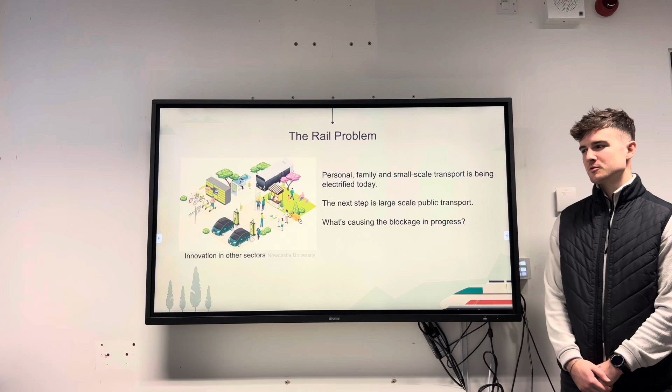Innovation is seen throughout many sectors. If you Google future cities and sustainability, images like this appear. What you'll notice straight away is your personal, your family and your small scale transport. You can see that with the cars, the electric bikes and the shuttle buses. What you are missing is large scale public transport.

So the next step is that. But what is the issue? What's causing the blockages? Why isn't this already included?

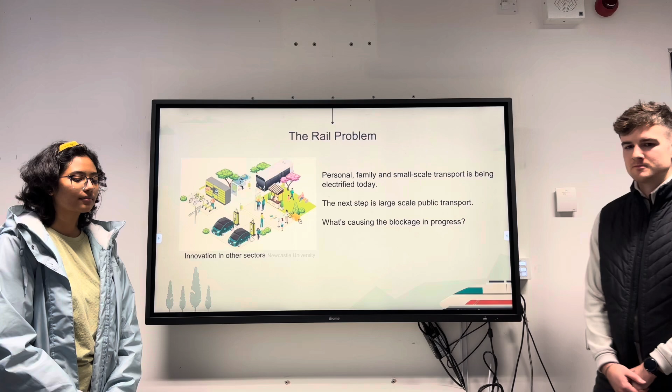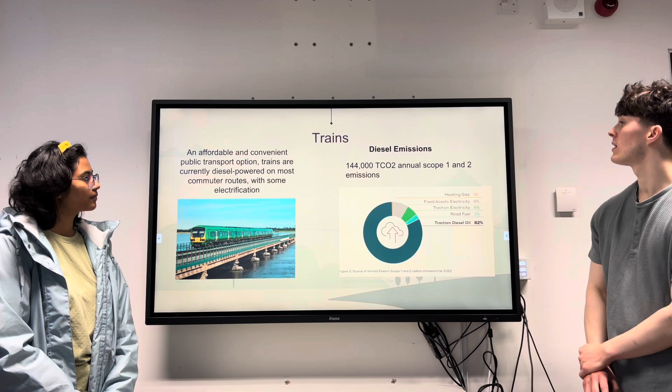Trains, as you know, are affordable public transport. They're convenient, and currently almost all run on diesel. There's a small bit of electrification in Dublin in the DART. This massive usage of diesel incurs high carbon taxes and massive greenhouse gas emissions, with 144,000 tonnes of carbon being emitted by Irish Rail.

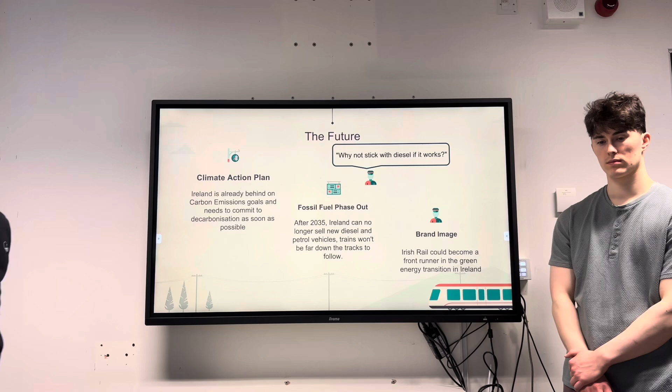Ireland is set to miss its climate action goals for 2030 and 2050. For 2030, emissions were to reduce by 51%, which is deemed almost impossible at the moment. Therefore, the country is facing high European carbon charges.

Fossil fuels are being phased out worldwide. The true cost of burning fossil fuels is being experienced through the environment and also through public respiratory health. Diesel engines will soon be obsolete, and we think that Irish Rail can take this opportunity to get ahead of the curve.

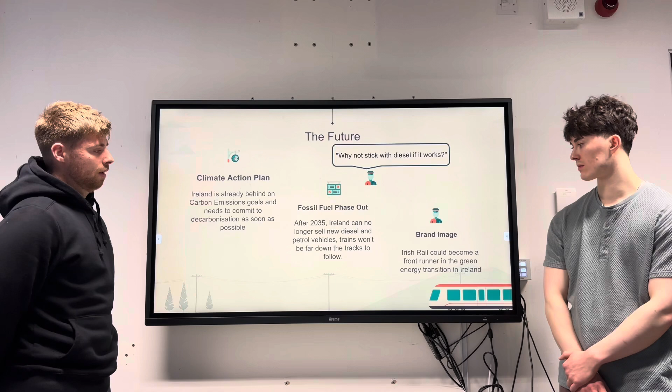Finally, we believe that this can offer Irish Rail a fantastic opportunity to become green ambassadors for sustainable transport across the world. Okay, so how do we solve it?

Modular batteries. Decarbonisation is costly, and batteries are a faster and more cost-effective solution than overhead electrification. Modularity, our key point, is a quick swap in, swap out for refueling.

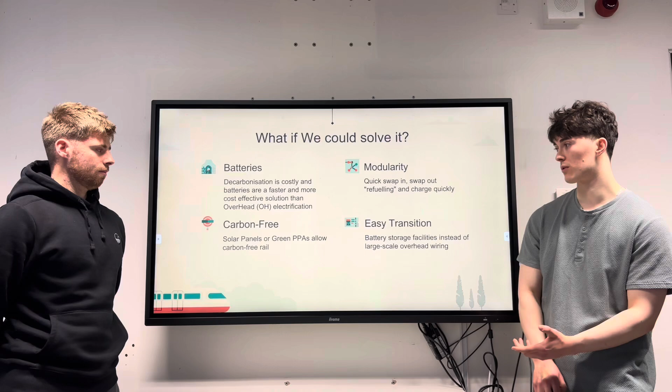The batteries themselves charge quickly. Through solar panels or green power purchasing agreements, where you agree with your electricity supplier that all your electricity comes from renewable sources, you could conceivably have carbon-free rail travel.

Lastly, it's an easy transition. Battery storage facilities will still have to be built, but these come at a fraction of the cost of large-scale overhead wiring, which will be discussed again later.

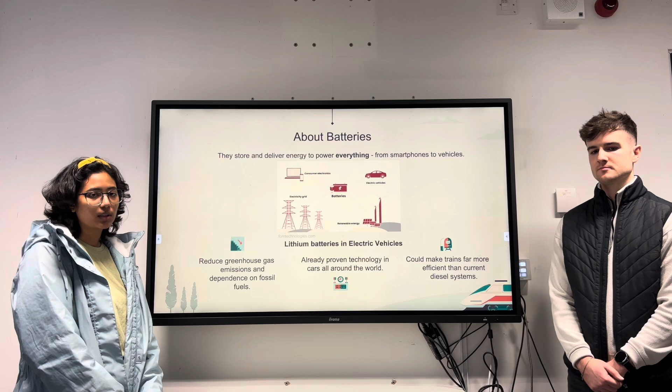Lithium batteries are being used in electrical vehicles for a number of reasons. They reduce greenhouse gas emissions and dependence on fossil fuels. They're already proven being used in cars all around the world, and they're 20 times less likely to catch fire when compared to petrol and diesel cars. These batteries in trains could make it far more efficient than the current diesel systems. So as you pointed out, they're safer and more efficient and less carbon.

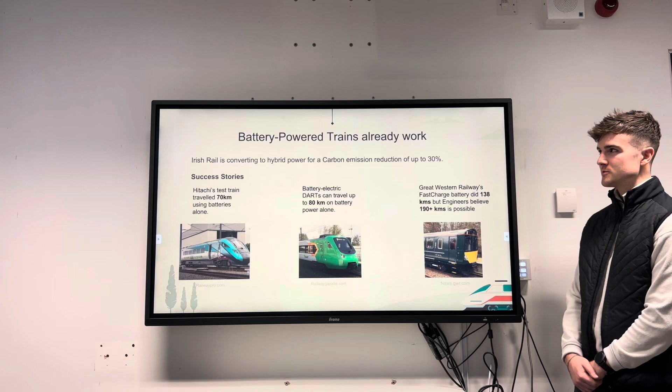So have they been tried? They have been tried is the great part. They've worked across 3 different scenarios. Firstly, Hitachi manufacturer have found 70 kilometers of range on their batteries. DART up in Dublin has done 80 kilometers of range, and the Great Western Railway in England has gotten up to 138 kilometers. And the engineers perceive up to 190 plus kilometers is possible.

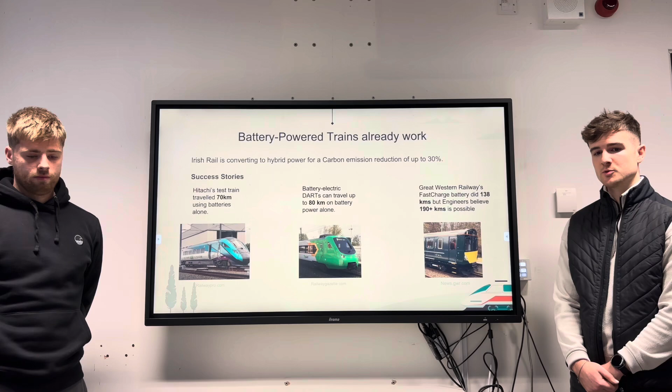Our solution, on the other hand, 943 million. Now, this includes the batteries themselves, retrofitting and upgrading carriages on the trains, and also the construction of battery charging stations at all 11 terminal stations and also 30 of the smaller stations, which will be discussed at a later point in the project.

So battery technology is constantly developing. It's becoming more efficient and more economic than fossil fuel systems. Current technology used in electric vehicles at the moment are lithium-ion cells, which have a life of about 300,000 kilometres. But future technologies such as solid-state batteries, which are expected in 2030, are expected to have a lifetime of about 1 million kilometres and are much more energy dense.

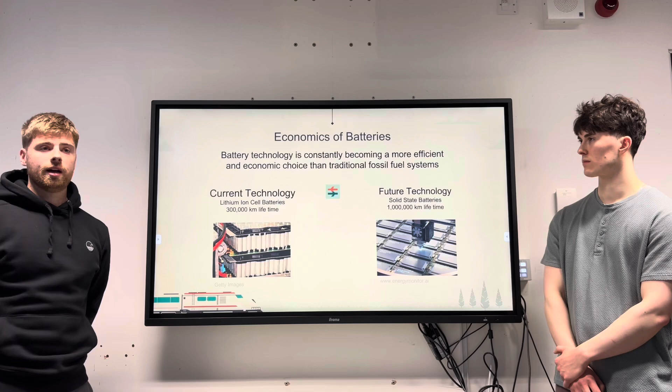So as part of our investigation, we undertook a feasibility study across a number of stations in Ireland to see the available space there was for installing these charging stations. We found that there was an enormous amount of free rail yard space in Ireland and a lot of existing lines that are no longer used. So it was definitely feasible in most cases to install these stations.

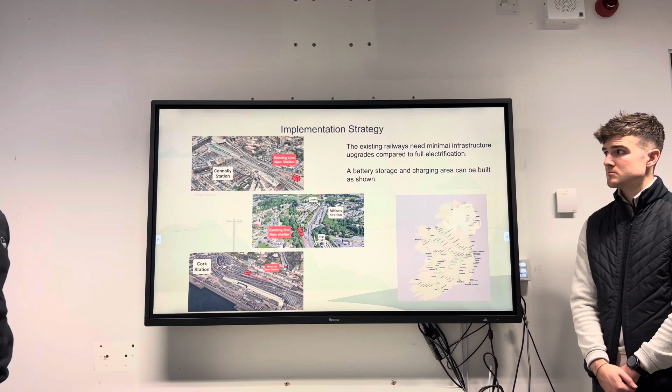So if all the trains were to be converted to electric trains, we would save up to 180,000 tons of carbon dioxide per year. And switching from inefficient diesel vehicle engines to electric motors would save up to 225 million kilowatt hours. Using battery trains would save up to 87% in cost when compared to overhead electrification, and that's why we think our modular battery solution is the next revolution in rail.

Okay, so separately on modular reflection, our 3 main takeaways as we went through it were firstly the importance of interactivity. The insights we gained when going out and doing the interviews is invaluable, getting the industry experts' opinions, their own knowledge, and challenges we hadn't thought of, and how they were able to go about them and give us guidance throughout was very helpful.

So the design thinking process was new to all 4 of us. We really enjoyed going through it and came away with the main learning points of the lean canvas and developing the persona map, and how critical this was for the rest of the process.